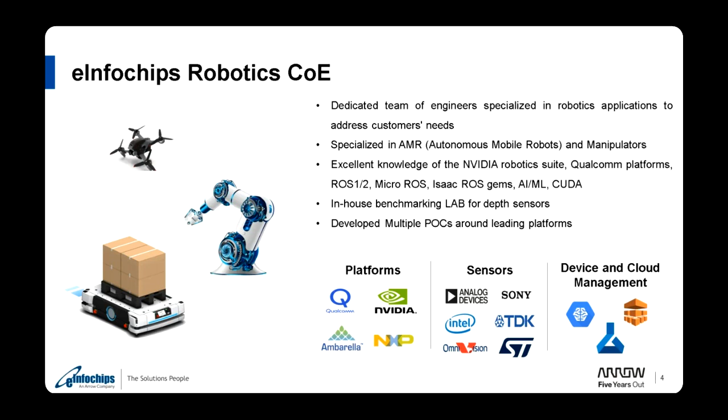At eInfochips Robotics Center of Excellence, we have developed 3 versions of autonomous mobile robots equipped with SLAM and navigation techniques on Qualcomm and Nvidia boards. The software leverages the Nvidia robotics stack, Isaac, and robot operating system, that is ROS. We have developed a digital twin for simulation and training of the AI/ML algorithms. All our robots are cloud connected for updates.

Let's begin by answering the question, what is robotics? Robotics is an interdisciplinary field combining engineering and science to design, build, operate, and utilize robots. At its core, robotics integrates multiple disciplines like mechanical, electrical, computer engineering, as well as artificial intelligence. To understand robotics better, let's break it into three core components: perception, decision making, and actuation.

Perception involves sensors that allow robots to interpret data from their surroundings, like cameras, LiDAR, or IMU sensors. Decision making: robots rely on algorithms and control systems to process the data they receive and decide what actions to take. Actuation: actuation is about movement, using motors and mechanisms to physically interact with the environment.

These components are the foundation of robotics and enable diverse applications. Think about industrial robots assembling cars, robotic arms assisting surgeons, or even robotic rovers exploring Mars. Robotics touches every field, like manufacturing, healthcare, and entertainment.

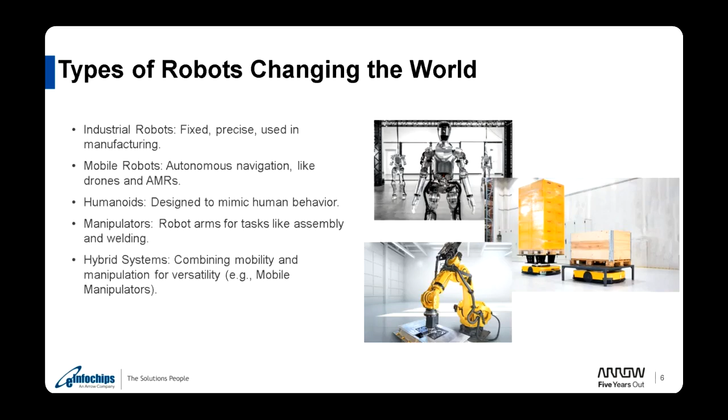To appreciate the advancements in robotics, let's take a quick look at its evolution. In the early days, robotic systems focused on performing repetitive and precise tasks in controlled environments. These robots, like industrial arms, were stationary and operated in fixed locations. As technology advanced, modern robotics introduced artificial intelligence and advanced sensors, making robots smarter and more adaptable.

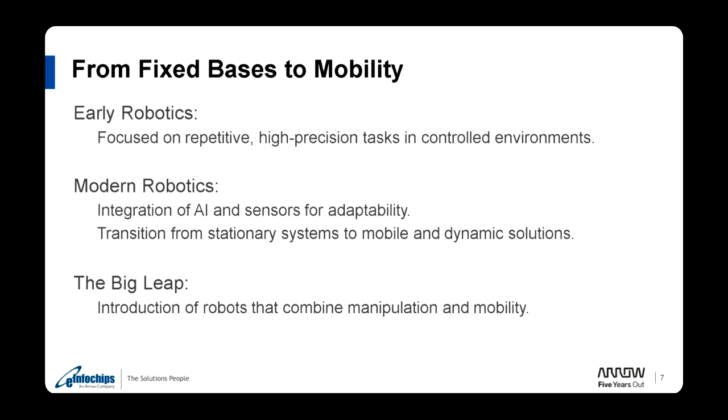The most significant milestone in robotics was the transition from fixed systems to mobile robots. Mobile robots brought flexibility, allowing robots to navigate in dynamic and unstructured environments. The big leap came when robots began combining manipulation and mobility. This capability opened up possibilities like robots working alongside humans in warehouses or assisting in disaster recovery.

Now let's zoom into one of the most fascinating advancements in robotics, autonomous mobile robots, or AMR. AMRs are robots capable of navigating real-world environments without human intervention. They achieve this through advanced technologies like SLAM, or simultaneous localization and mapping, which allows the robot to build a map of its surroundings and localize itself within it.

Sensors: AMRs use tools like LiDAR, cameras, and depth sensors to perceive their environment. Artificial intelligence enables decision making and adaptability, allowing AMRs to handle dynamic situations like avoiding obstacles or rerouting when paths are blocked.

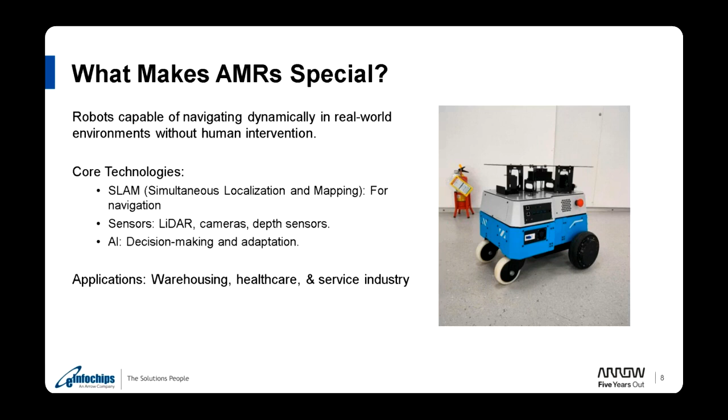Applications of AMR are incredibly diverse, including warehousing, where they handle inventory, healthcare, where they deliver medical supplies, and service industries like hospitality. AMRs are the backbone of modern intelligent automation systems.

The next step in robotics evolution is the mobile manipulator, a robot that combines the mobility of an AMR with the dexterity of a robotic arm.

So what makes mobile manipulators special? They combine the best of both worlds. Mobility allows them to navigate through environments like warehouses or factories, while manipulation enables them to interact with objects, picking, placing, or even assembling components. They overcome the limitations of fixed robotic arms by functioning in dynamic and unstructured environments.

For example, they can retrieve items from shelves, work alongside humans in manufacturing, or assist in medical settings. In the next phase of robotics, we will see how voice command, computer vision, and advanced robotics algorithms are driving this integration, making mobile manipulators smarter and more human friendly.

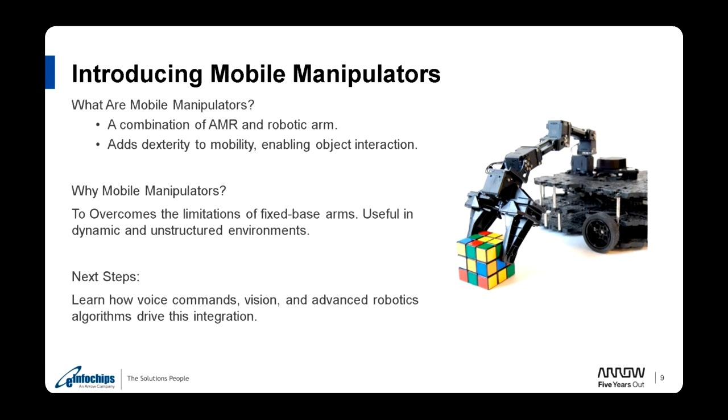Let's bring all these concepts together and explore a real world use case of advanced robotics in action. Imagine this scenario: an autonomous mobile robot is tasked with picking up a specific colored golf ball and placing it into a mug. How does this process unfold? Let's break it into steps.

First, interpret the voice command. The process begins when the AMR receives a voice command, for example, someone says 'pick red golf ball and place it in the mug.' The robot uses advanced natural language processing to understand the command, breaking it down into actionable tasks.

Second, detect and localize the ball using vision and depth data. Next, the AMR activates its vision system. Cameras and depth sensors identify the ball's color, size, and precise location within the environment. This step showcases the integration of computer vision.

Third, navigate autonomously to the ball. Once the ball is located, the AMR uses its SLAM system to plot a path. It navigates around obstacles and dynamically adapts to the environment, demonstrating its mobility and autonomy.

Fourth, grasp and place the ball in the mug using precise manipulation. When the AMR reaches the ball, its robotic arm, equipped with an end effector for precise grasping, picks up the ball. Then, with careful coordination, it places the ball into the mug.

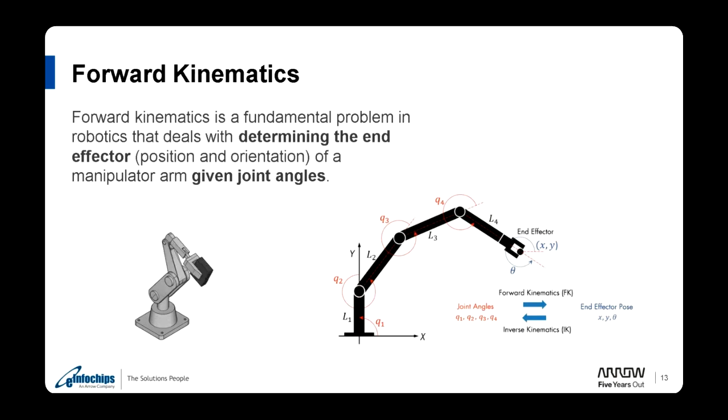In our robot, forward kinematics allows us to compute the gripper location precisely when we know the joint configurations. This is critical for basic operations like positioning the arm for pick and place tasks. While forward kinematics tells us where the end effector is, the next step, inverse kinematics, helps us figure out how to reach a desired position, which we will discuss in the coming slide.

Now that we understand forward kinematics, let's move to its counterpart, inverse kinematics. Inverse kinematics is the process of determining what joint angles or positions are needed to place the robot's end effector at a specific target position and orientation in space. So how does it work? Unlike forward kinematics, where we calculate the end effector position from joint angles, here the input is the desired position of the end effector, and the output is the required joint configurations. Solving this is often more complex because there are multiple solutions, or sometimes no solution, depending on the target.

So why is it important? Precision manipulation: it allows the robot to reach specific targets even in unstructured environments. Motion planning: in tasks like picking an object or assembling a component, inverse kinematics ensures the robot's arm moves smoothly and accurately to the required position.

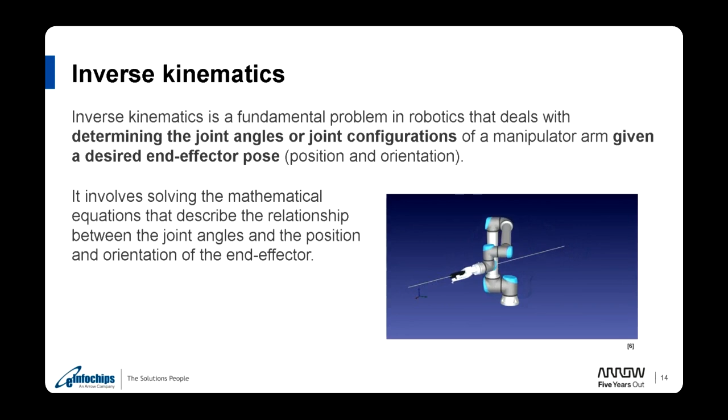For example, if we want our robot to pick up a mug placed on a table, inverse kinematics calculates the joint angles required to position the gripper precisely over the mug. Together, forward and inverse kinematics form the foundation for robotic motion and manipulation, enabling robots to interact with their environment effectively.

Let's move towards ROS2. We are using ROS in our robot. The Robot Operating System, ROS, is a set of software libraries and tools for building robot applications. It acts like middleware on top of the operating system.

It has a publisher and subscriber mechanism for data transfer. ROS2 uses DDS, Data Distribution Services, as its middleware to handle communication between components. It works on Linux, Windows, Mac OS, and RTOS. The architecture of ROS2 follows a modular approach.

At the core, it has nodes, which are individual components of a robotic system. These nodes communicate using topics for continuous data streaming, and services for request-response interactions.

ROS 2 brings several major improvements over ROS 1. The real-time capability allows robots to react faster, making it ideal for applications like self-driving cars or industrial automation. ROS 2 also eliminates the need for a central ROS master by using DDS-based communication, making it more reliable and scalable. Security has also been improved in ROS 2 with encryption and authentication, making it safer for commercial applications.

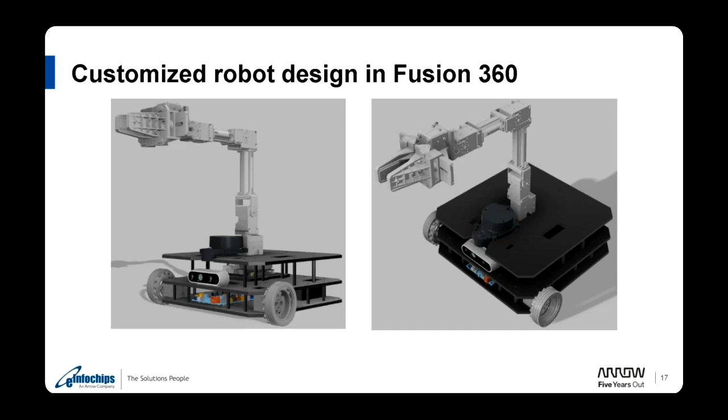Now that you have seen the finished robot, let's break it down further and take a closer look at its components in the next slide.

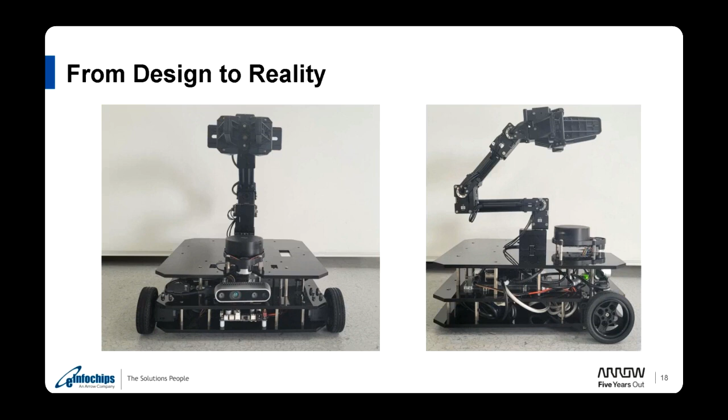First of all, the controller board. This is the brain of the robot. It processes all the input from sensors and executes the commands for navigation and manipulation. Second, motors. We have used two high torque motors for movement. These provide the necessary power and precision for the robot to navigate dynamically.

Third is the manipulator arm. This arm is equipped for object interaction, designed specifically for tasks like picking and placing. Fourth is the camera. The camera is a crucial part of the robot's perception system. It enables object detection and recognition using algorithms like YOLO.

Fifth is the lidar sensor. The lidar ensures the robot can map its surroundings and navigate autonomously, avoiding obstacles while reaching its target. Sixth is the battery. The battery powers the entire system. It's chosen to provide a balance between performance and runtime, allowing the robot to operate for extended periods.

Each of these components plays a critical role in the overall functionality of the robot. Together, they enable it to perceive the environment, make decisions, and execute tasks effectively. Understanding the hardware is essential because it sets the foundation for integrating the software, which is what brings this robot to life. Let's now transition to the software side, starting with the flow diagram of our algorithm.

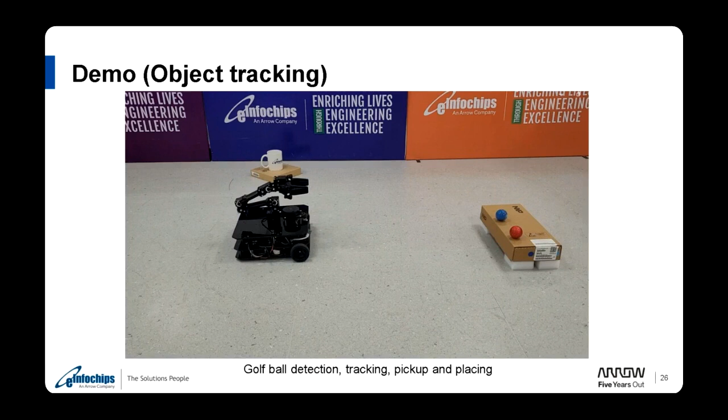Let's take a look at the system in action. Here we have our setup, an AMR equipped with a robotic arm. The golf ball is placed at a distance, requiring the AMR to move towards it before picking it up. On the screen, you can see the camera feed on the right side. Once we give the command, the object detection algorithm kicks in, identifying the golf ball with a bounding box.

Now the AMR begins its movement, navigating towards the ball using real-time tracking. It ensures that it precisely reaches the correct position. Once in position, the robotic arm executes the pickup using inverse kinematics.

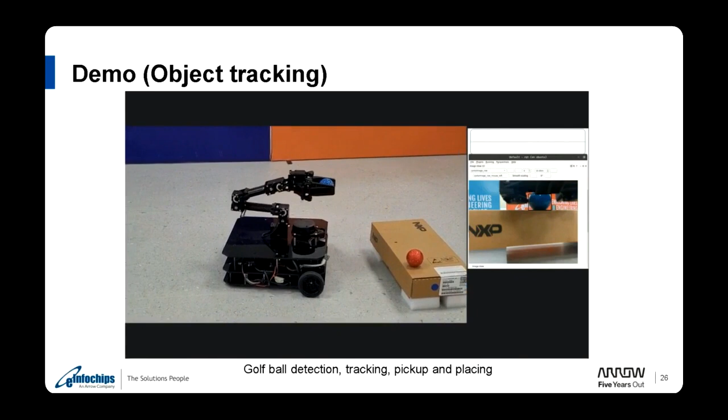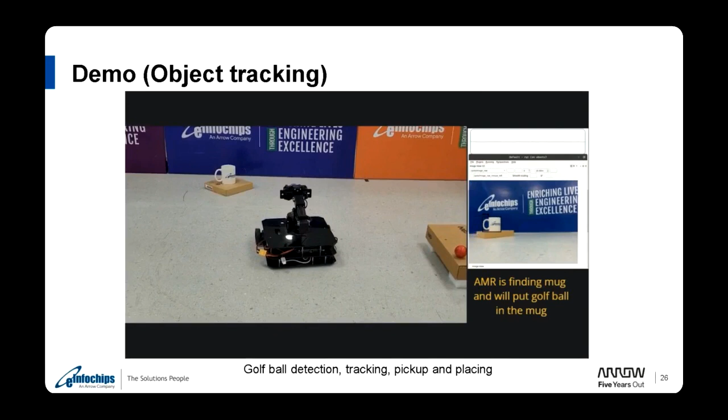With the ball secured, the system now shifts focus to the next objective, locating the mug. The AMR begins scanning for it, continuously updating its path based on real-time visual input. You will see, as someone moves the mug, the AMR dynamically adjusts its position. This demonstrates the adaptability of the system.

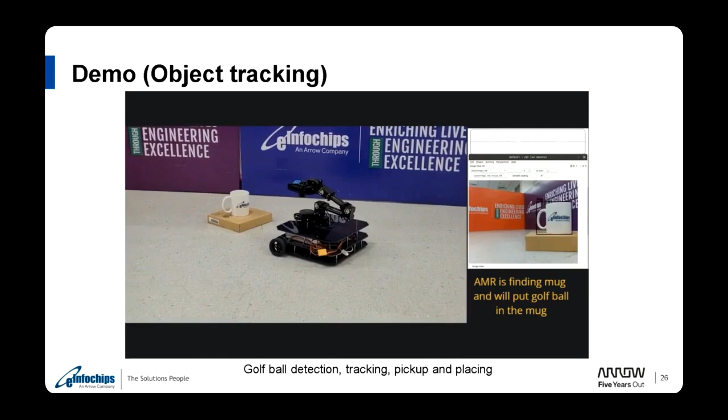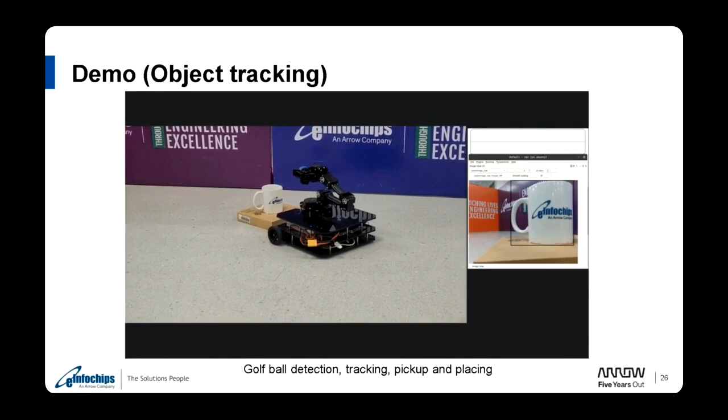It's not just following a pre-programmed path, but actively responding to changes in the environment. Finally, the AMR reaches the mug and carefully places the ball inside, completing the entire process seamlessly. From detection to navigation, pickup, and placement, this showcases the full capability of our system. This demo highlights how AI-driven perception and control allow the robot to interact dynamically with its surroundings.